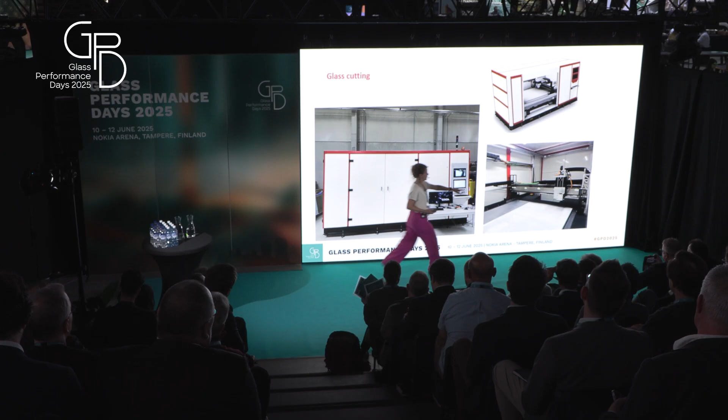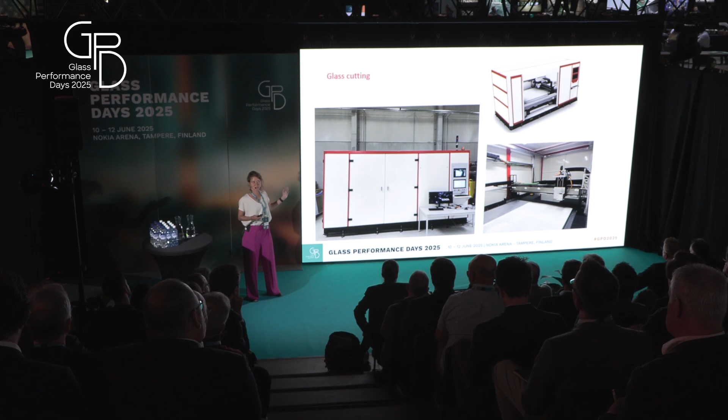This is a laser machine we have in-house. You see here is the laser, and it can move in the beam like this, but you also have a rail, so it can move in X and Y, and also in height. So there's also a height movement possible. And it's in a closed box, which makes it a classification 1 laser machine. That means no laser can come out of the machine - that's something you definitely want.

If you then look at how it works - cutting is in fact two processes. First, you're going to filament the glass, so you make little holes or little scratched lines in it. And then you cleave it. Cleave, you can compare it with breaking it. That's something you can do by heating it up with a laser, for example, and then you can cleave the glass.

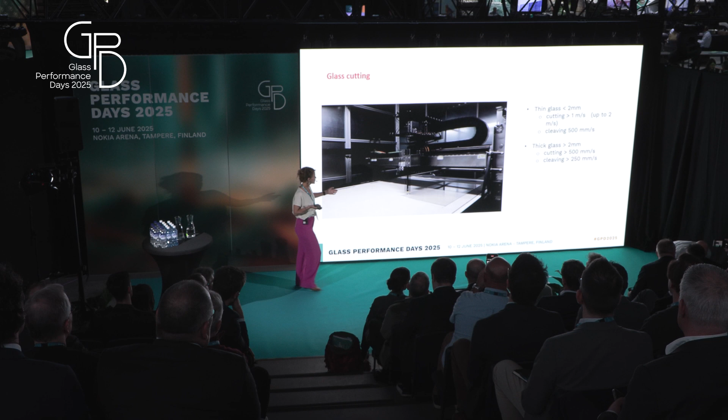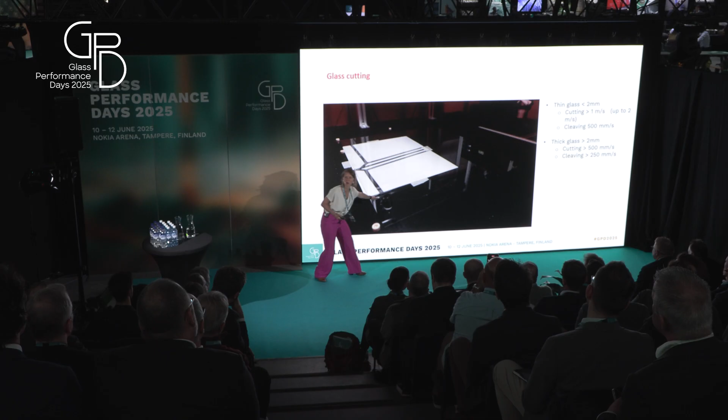And here you have a movie. It's really cutting the glass, but it's an invisible laser, so you don't see much, but the glass is cut. We tried the same by putting a white paper under it with black lines, and then you see it a bit better - you'll see that a crack will appear here. And then, okay, now it's heated up and it's completely broken.

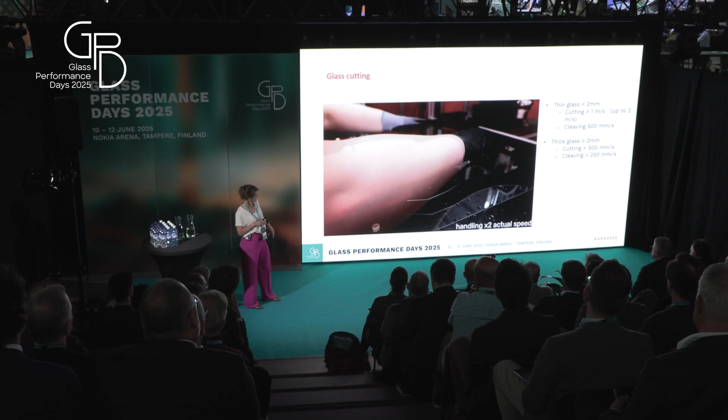And now my colleague will take it out. And that's two times the speed, the handling - this handling is two times the speed, to give you an idea. Of course, you can also do that with a pick and place robot and then just pick the glass and let the scrap fall down.

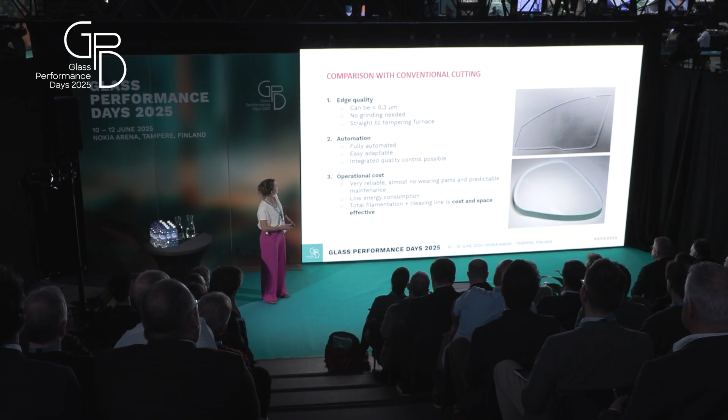So what's really interesting about it is the very nice quality of the edges. No grinding is needed anymore. It can be fully automated. You don't need water, you don't have a dirty process. You can integrate quality control easily because you don't have dirty water or anything that creates problems. It's very reliable - so those are the benefits.

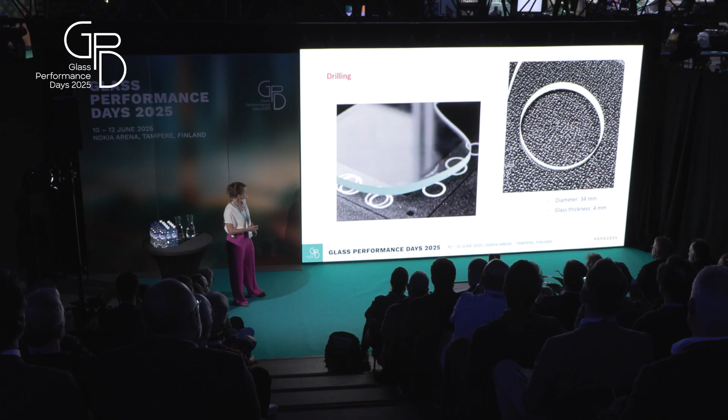For drilling, it's more or less the same, let's say. I hope my movie works. So, but then you're going to drill. This is a green laser - very clear, I think. And here you see the process because the laser is visible. And now it's just drilling through quite thick glass here.

You see again that the edge quality is really nice - it's not treated afterwards. And now you see the hole in it. So very good edge quality, and in fact the same benefits.

So easy to integrate automation, you don't have water supply. You also don't need an operator to change the drills, because if you need a bigger hole, you can just select that in the HMI. It's very easy - you can connect that to your ERP system and just make it fully automated.

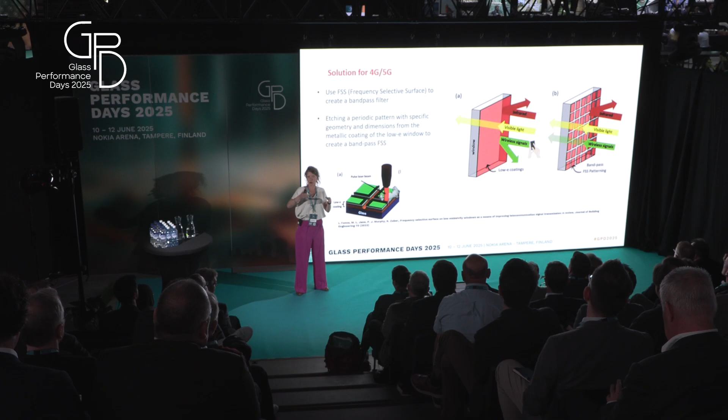The problem is that the coating reflects not only infrared but also wireless signals. So in new buildings, you often have connectivity problems with your cell phone. The easy solution is to remove parts of the coating, which will still filter out the infrared signal but let the wireless signals through.

So what you do is make a grid. Here you can see the laser working, making a grid pattern on glass. This is a jumbo machine we have in production at the moment. And then it comes out like this, a glass with rectangles all over it.

The rectangles are 0.06 millimeters, so very thin, and 40 by 40. It's not only rectangles though. We work together with KU Leuven to test how good the connectivity is before and after decoating, with different types of glass. What we see is that rectangular forms aren't the only interesting ones. You also have patterns some call turtle, some call giraffe, and honeycomb is also possible. There are a lot of patterns possible.

Here you see a train in Belgium. The upper windows of the train are decoated by our machines. It's already been like that for years, and you have a good signal in the train.

What's the difference if you would do it with general cutting? You don't have grinding marks because the laser will only touch the coating and not the glass.

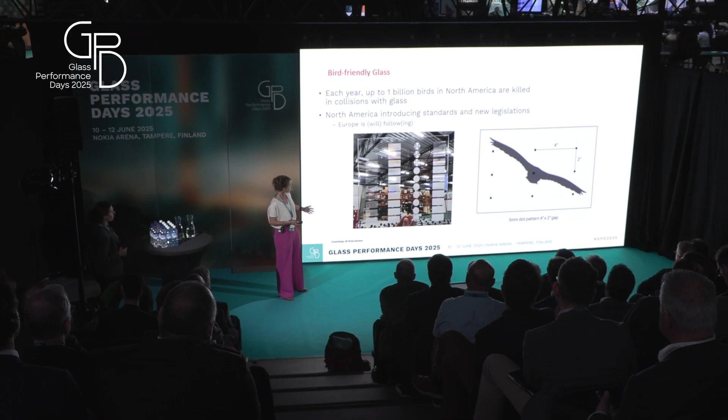The last option I wanted to show you is bird-friendly glass. That's a hot topic in America, with regulations already in place. Europe will probably follow, though we don't know that yet. So here you see, for example, a glass full of dots to prevent birds flying into it.

You can play with all the dots. IGU units can be put directly on the machine as the last step in the process. Here you see different types of dots. I wanted to show that the longer you laser on a dot, the more whitish it becomes. It's as simple as that, it's more engraved.

You can, for example, do it with a spiral, so here you really see a bit of a disc pattern. But here are just lines, so here it's more of an opaque dot. You can play with a lot of things. Birds don't like reflective dots, so that's something you also need to measure if you want bird-friendly dots.

And here you have the machine working normally, so you can see how it works. Here we have 4 heads, we can go up to 12 heads. It makes dots, jumps, and makes the next 4 dots.

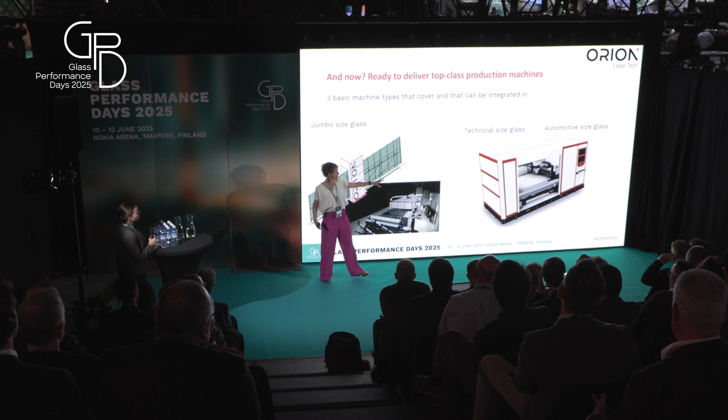What's the future potential? You can input that laser on all kinds of machines, putting it on jumbo glass. Our newest one is much thinner, or horizontal. This is the biggest of the two machines we often build, for automotive glass, but we also have a smaller one for more technical glass sizes, with a pick and place system.

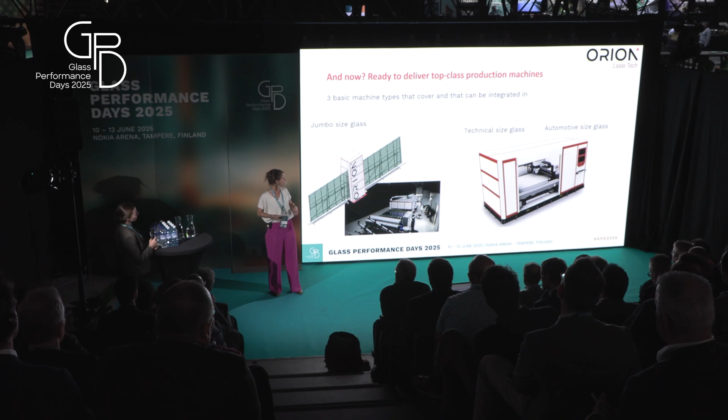At this moment, I've only covered the basics, things already in the market. But we see smart buildings and better connectivity increasing because connectivity is important and will become more and more important in the future: safer glass, 3D cutting of glass, bird-friendly glass. At this moment it's almost only dots, but we see change there too, with all kinds of patterns coming up. Enhanced displays for electronics, switchable glass, optical innovations.

A lot is possible. Why do we believe lasers will be the future? Because of their precision, sustainability, and efficiency. It's smarter, safer, and has a smaller footprint. You can customize and automate a lot.